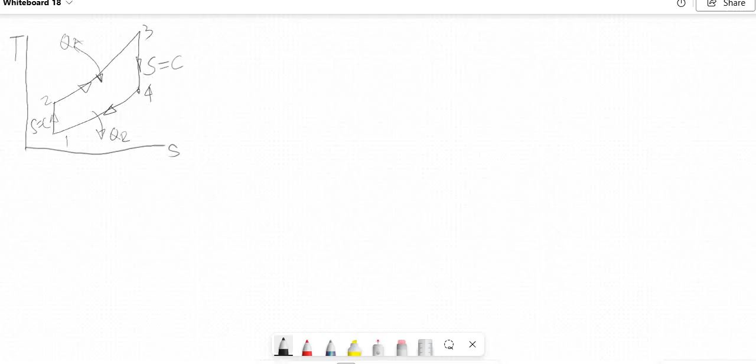So T1 is equal to 300 Kelvin. P1 is equal to 100 kilopascal. Then we have RP, or the pressure ratio between P2 and P1, which is also equal to P3 over P4, which is equal to 8.

So letter A, we will determine T2, that is the exit temperature of the compressor, and T4, that is the exit temperature of the turbine. Okay, so now, utilizing air standard assumption, that means we will be using the property table.

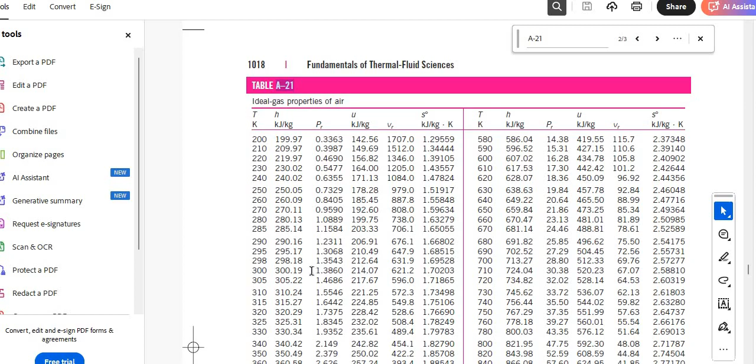So at T1 equals 300 Kelvin, we shall get PR1 as well as enthalpy 1 using the property table. So PR1 is at 300. So our PR1, where is the 300 here? Here. So 1.386 is our PR1.

1.386. Why do we use PR1, sir? Because RP is given, the pressure ratio. So if this were an Otto cycle or Diesel cycle, we would use RK, that's what's used for Otto and Diesel, right? Then enthalpy, I already explained in problem number 1 why we use enthalpy. So this is 300.19.

Then next for state 2, T2, for state 2, we have PR2 over PR1, which is also equal to RP. Then it's the same for PR3 over PR4, that's how it works, which is equal to 8. So our PR2 is equal to 8 times 1.386, which is equal to 11.09.

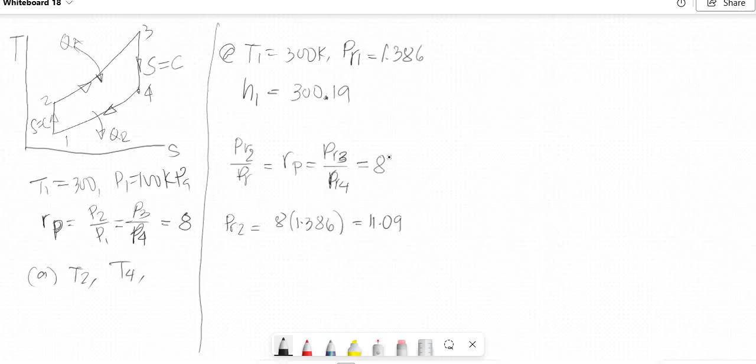And then let's go to the property table. 11.09. Is 11.09 here as PR? It's in between 10.37 and 11.10. So let's interpolate. We can get the temperature, 530 at 10.37 and 540 at 11.10, as well as the enthalpy, here and 544.35. So we can get the enthalpy and T2 from there. Let's interpolate for T2. Approximately 540 Kelvin is our T2.

Then our H2, we'll use this later. H2 is 544.35 kilojoules per kilogram. Okay, so we got T2. Now for T4, that's the exit of the turbine.

So given the temperature, we forgot to include T3, which is 1,300 Kelvin. So at 1,300 Kelvin, we can get our PR3 as well as our H3.

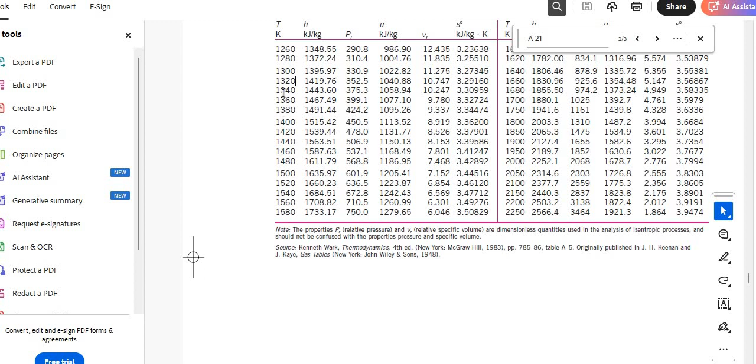Let me repeat that we use enthalpy because in the compressor and the turbine, the fluid is in steady flow, so we use enthalpy. When it's non-flow, we use internal energy, U.

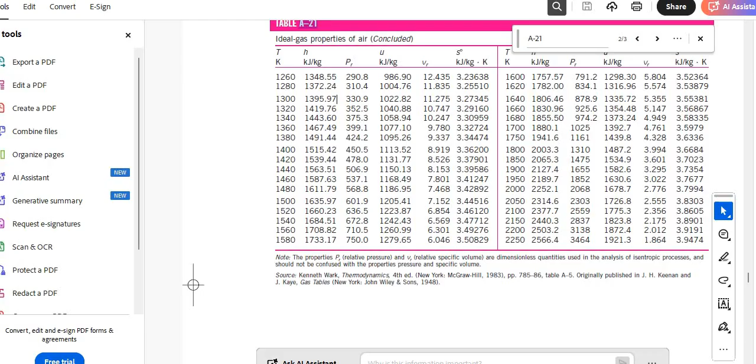So that is 1395.97 and 330.9. So let's go back here. 330.9 and then 1395.97. Okay, so that's our PR3 and H3.

Then let's go to 4. We said earlier that PR4, where is that? Here. PR4 is equal to PR3 over RP. So 330.9 divided by 8. So this is 41.36. Now let's go to 41.36 as PR.

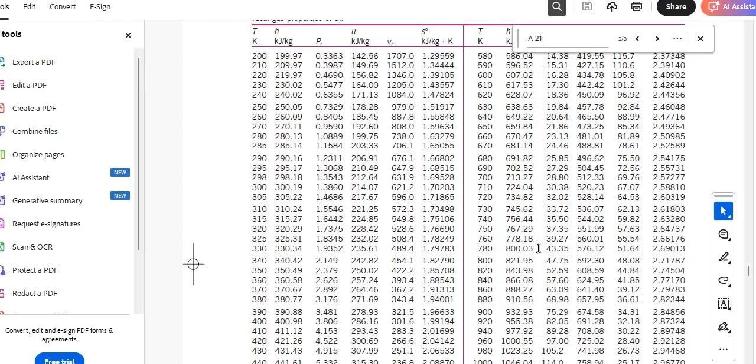Where is 41.36 PR? Here, it's between 39.27 and 43.35, and the temperature is between 760 and 780, as well as the enthalpy between 778 and 800.03. So when we interpolate, we get T4 equal to approximately 770 Kelvin. Then let's also get the enthalpy, that's equal to 789.37 kilojoule per kilogram. Okay, so we're done with letter A.

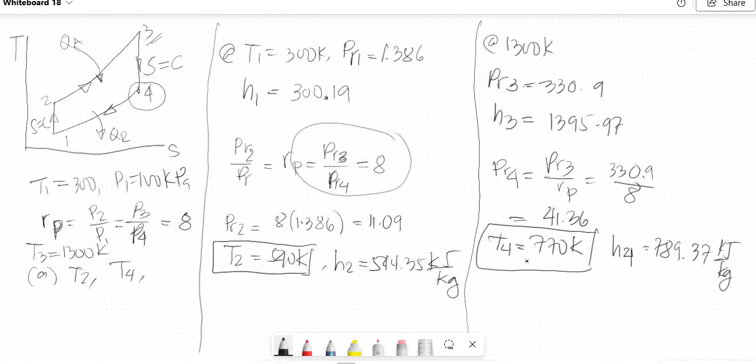So letter B, what does letter B ask again? Back work ratio. Okay, so back work ratio is equal to the work of the compressor over the work of the turbine.

The work of the compressor, since there's no mass given, we use per unit mass. That is equal to H2 minus H1. We already computed H2 earlier. Our H2 was 544.35, then 300.19 is our H1. So the work of the compressor is 244.16.

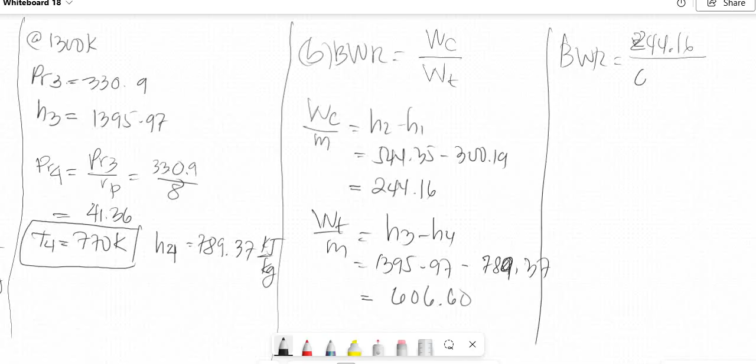Okay, so for back work ratio, substituting what we got, that is 244.16 divided by 606.60. Then we multiply that by 100%. So that is equal to 40.3%. That means 40% of the work of the turbine goes to the compressor.

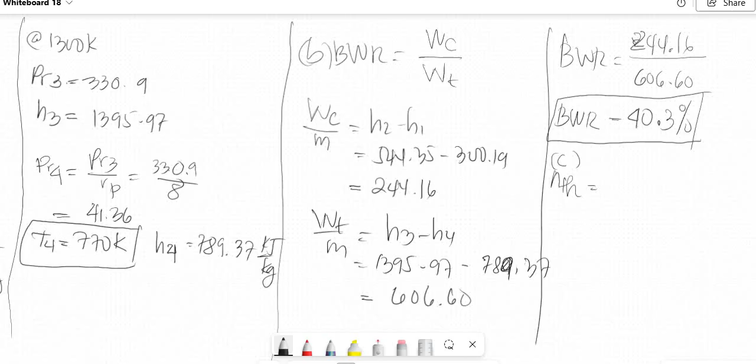Next, thermal efficiency, letter C. We can't use 1 less 1 over RP to the K less 1 here anymore, because we're using the property table now.

So that is 1 less QR over QA. There's no mass given, so QR per unit mass, which process is the heat rejection? That's 4 to 1, right? So what is our state 4... or to make it different, let's use work net over QA instead.

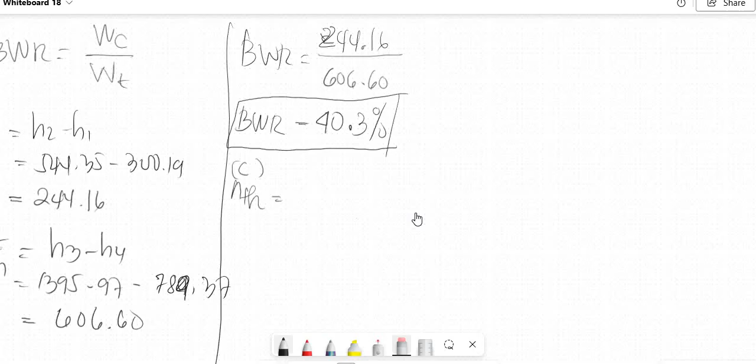So, work net over QA, wherein our work net has no mass, so we're using per unit mass since there's no given mass. This is work of turbine per unit mass less work of compressor per unit mass. So work net could also be QA less QR, right?

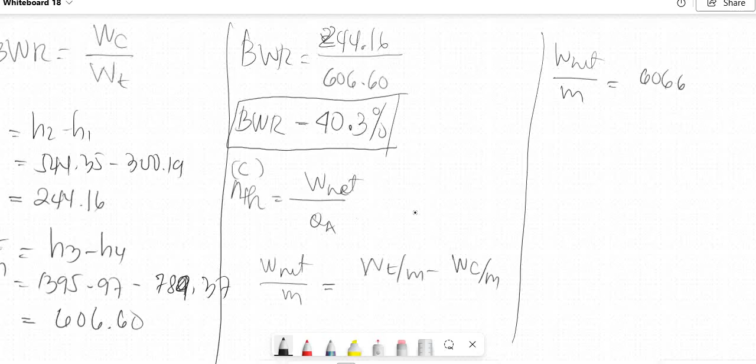So this is, what was our turbine value earlier, 606.60 less 244.16. So this is equal to... equal to 362.4 kilojoule per kilogram. Then next, our QA per unit mass, that is equal to H3 minus H2, because that's where the heat addition happens.

Our H3 is 1395... 95.97. Our H2 is 544.35. So this QA is 851.62. So the thermal efficiency is 362.4 over 851.62. This is equal to 42.6%, our thermal efficiency.

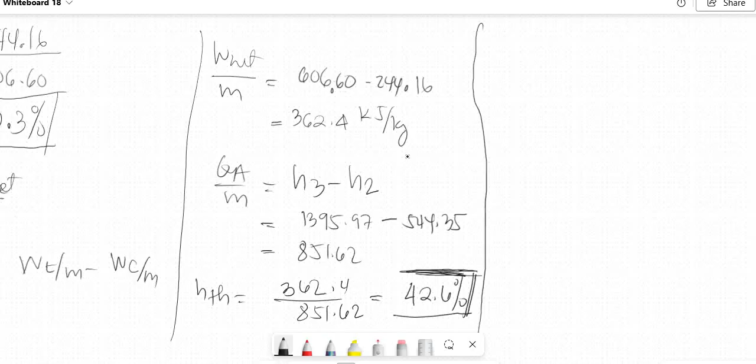Next, letter D, the mean effective pressure, that is work net over V max less V minimum, or this is equal to work net over V4 less V1, V4 is our V max. We already explained this in example number 1. So V1 based on that, that is equal to R T1 over P1, the specific volume since there's no given mass.

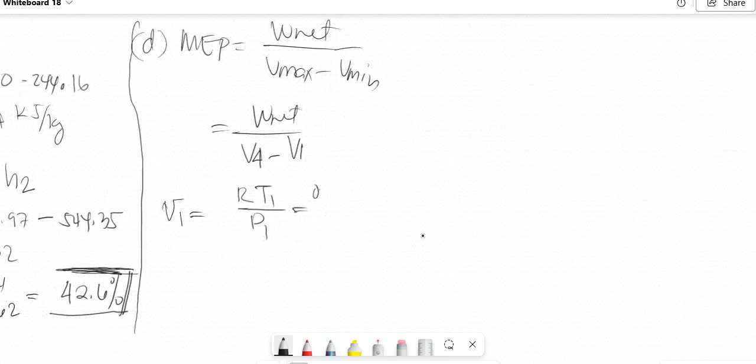So this is what we computed earlier. So 0.28708 and then 300 divided by 100. So what we computed earlier for the specific volume at state 1, where is that... it's gone... P1. That's it. This is 0.86124 cubic meter per kilogram.

And then our V4, so that's given already. At state 4, specific volume 4 is equal to R T4 over P4. Take note that P4 is equal to P1. So it's just ratio and proportion now. V4 is the only unknown since P4 V4 over T4 is equal to P1 V1 over T1. They have the same pressure.

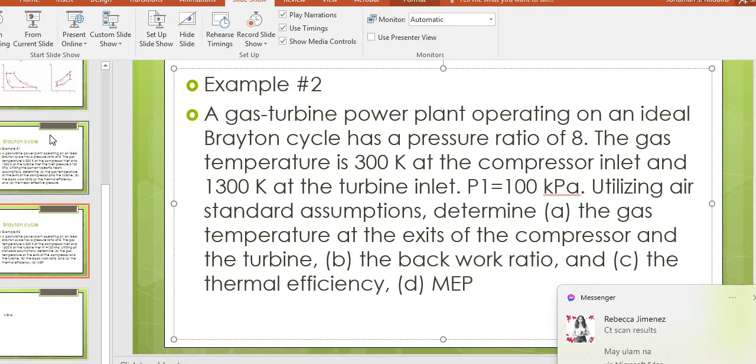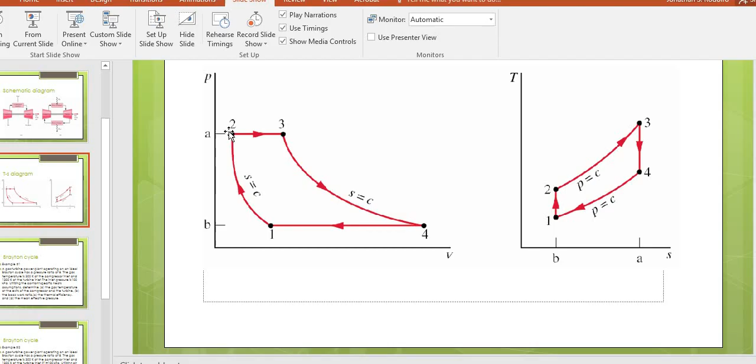So what do we get, V4, V2. So our V2 comes from 1, right? Process 1 to 2. So we have P1 V1 over T1 is equal to P2 V2 over T2. This is given already, V1 we already got, we have that too. From this we can get V2. Our P2 we can get using RP times P1.

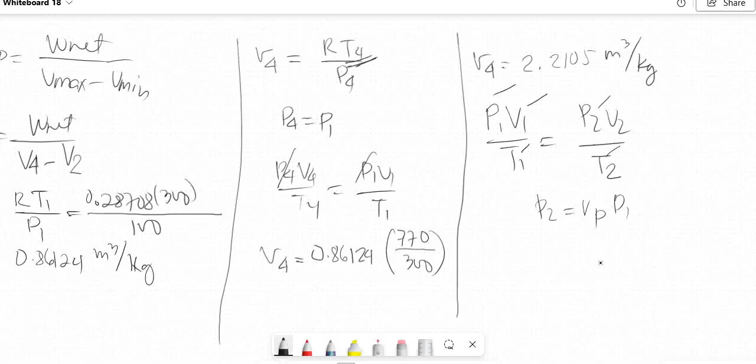So that becomes 800. 8 times 100 is equal to 800. And then V2 is equal to V1. What was our V1 earlier? 0.86124. Then we derive from here V1 and then P1 over P2 times T2 over T1.

So P1 over P2 is 1 over 8. And our T2, what did we get for T2 earlier? 540, then 300. Okay, let's compute this. This is 0.1938 cubic meter per kilogram.

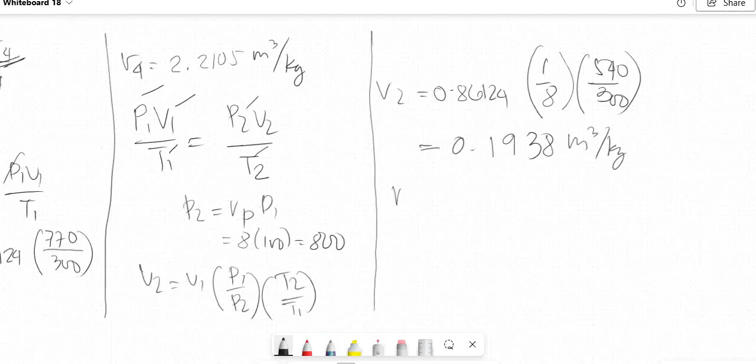So the mean effective pressure, the work net, we already got that earlier, right? What was our work net? 362.4 divided by V max, V4, which is 2.2105 minus 0.1938. So the mean effective pressure is equal to

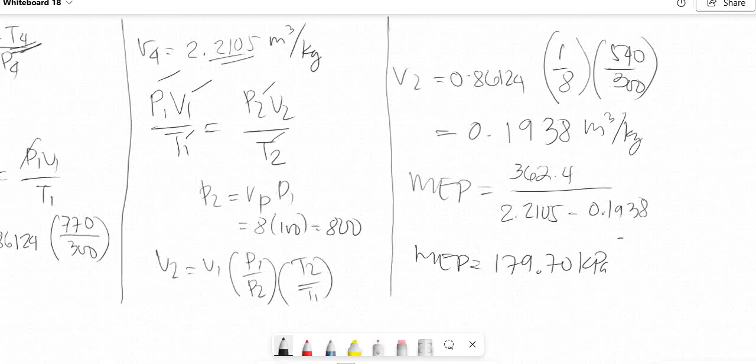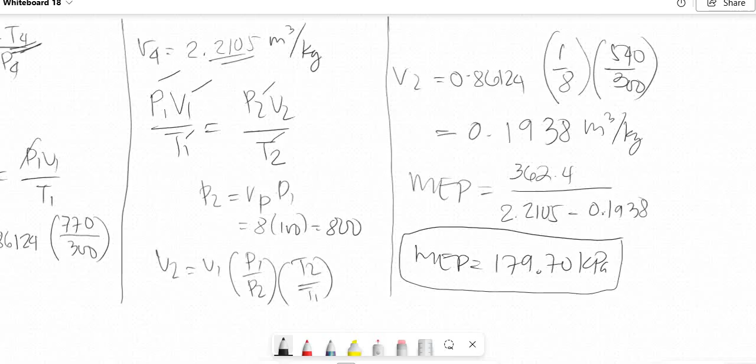179.70 kilopascal. So if we compare this to example number 1 earlier, the mean effective pressure we solved there was 182, so there's a slight difference. That's the difference in the Brayton cycle when using the property table versus assuming constant specific heats. So thank you for listening and watching.